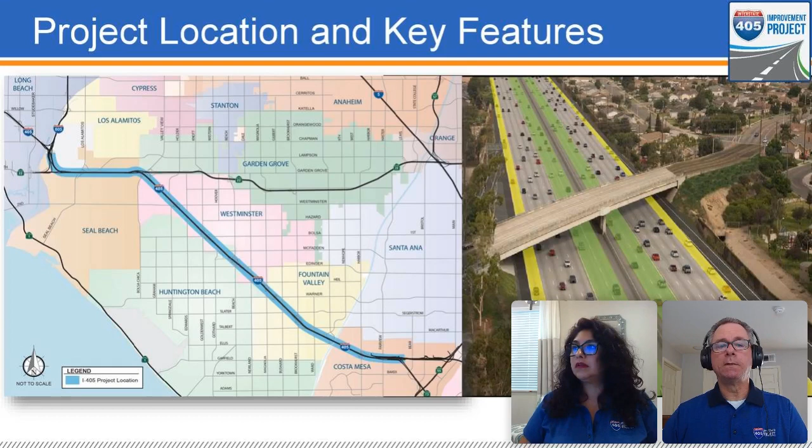Now a little bit about the project benefits. I mentioned the new lanes. We're also replacing 18 bridges. We're adding a new connector from State Route 73 directly to the I-405 express lanes. And we're widening several bridges that go over facilities like Beach Boulevard, Harbor Boulevard. We're widening bridges over the Santa Ana River as well, and a couple where railroads intersect with the freeway. All of the interchanges are being reconfigured in one way or another.

In a lot of cases, for example, say at Brookhurst or Beach Boulevard, you'll notice when you get off coming northbound, you're forced to sort of merge into those northbound lanes on Beach Boulevard, and you've got to try to move over really quick to get a left turn on McFadden, for example. Well, in the case of the new configuration, the northbound off-ramp will come to a T intersection with Beach Boulevard.

We will be eliminating the northbound loop off-ramp. So in other words, the northbound 405 loop off-ramp to southbound Beach Boulevard, that gets eliminated. And you'll be able to make a turn left or right from the straight northbound off-ramp. We're doing that in a lot of places. It's safer for motorists. It makes it easier to get over those several lanes to make the left to those arterials that are really close to the freeway. The other thing it does, of course, is make it safer for pedestrians and bicyclists.

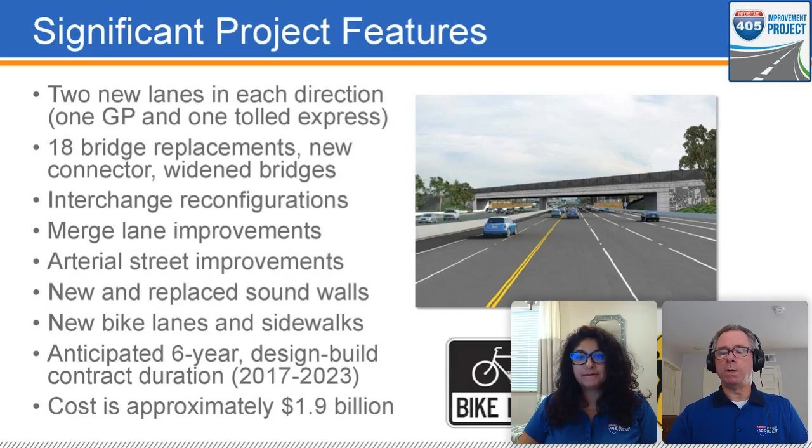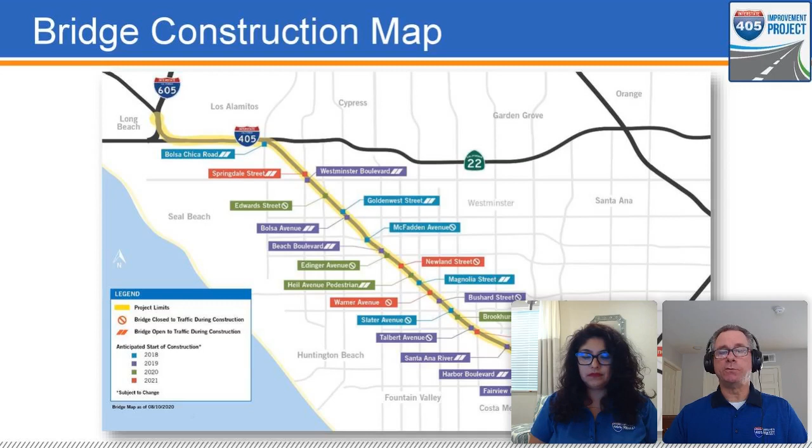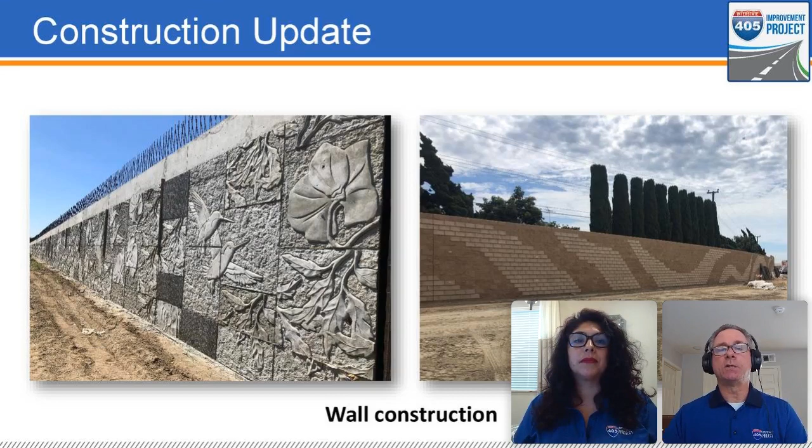So next, I'd like to talk a little bit more about construction, give you a little bit of a construction update. Maybe we can make ourselves a little smaller on the screen there so we can see these photos. So as I mentioned, a lot of walls on the project. More than 70 walls are currently under construction or completed. These 2 photos reflect some of the aesthetic patterns that are being placed on retaining walls and sound walls.

This slide shows the Santa Ana River Bridge, which spans both the river and Euclid Street in Fountain Valley. Now, this bridge is being widened using precast concrete girders. You can see those girders being placed there.

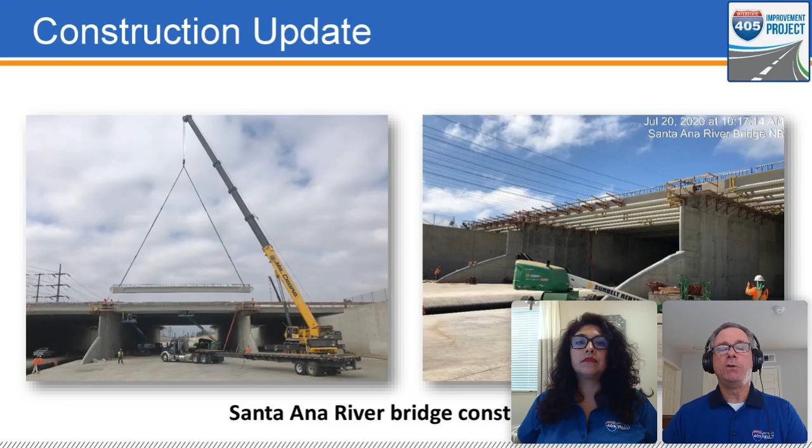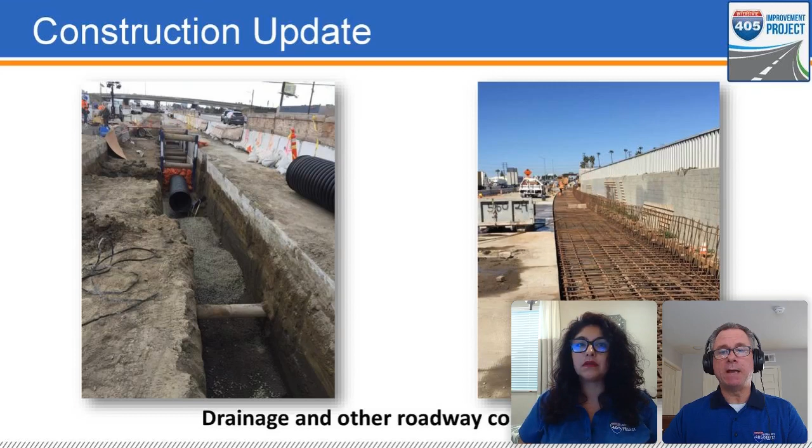This next slide shows the drainage being installed along the side of the freeway in the photo on the left, and the reinforcing steel for a concrete barrier and the concrete pavement in the photo on the right. So you'll see that throughout the project, where, for example, all the ramps are being converted to concrete. It's a little more expensive, but it lasts longer. All of the new lane additions where we're actually running traffic over new lanes, all of that's being implemented as concrete, reinforced steel concrete, just to make it last as long as it can.

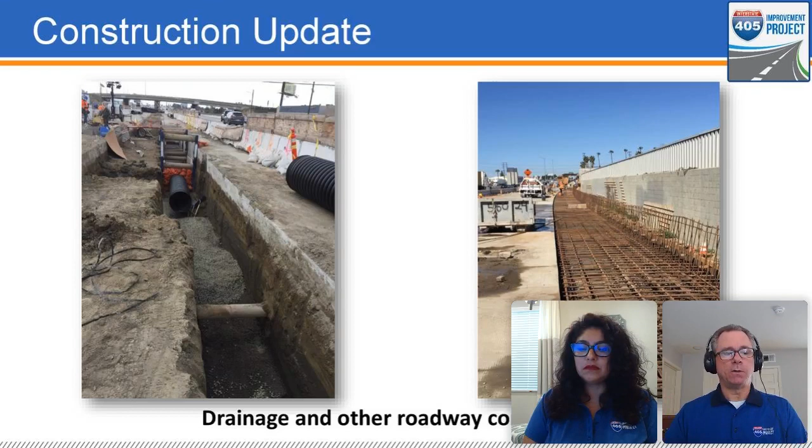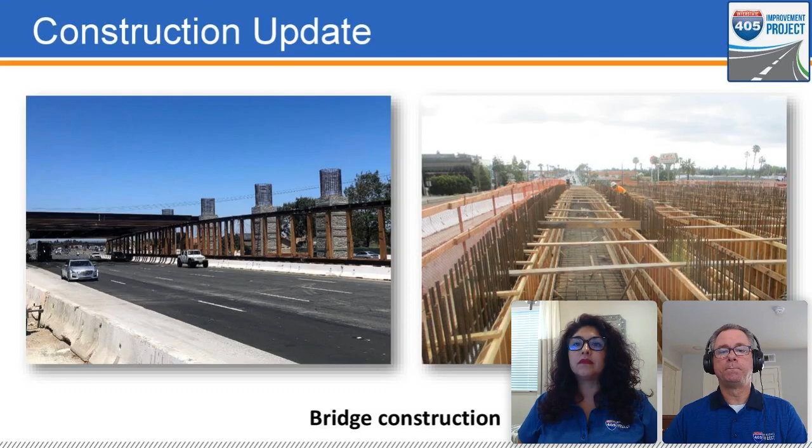The photos on this slide represent additional construction work going on at McFadden and at Westminster. The photo on the left shows the wooden formwork, and those are the forms that are in the bottom of the new concrete bridge. So they really are part of it; they stay there. They're ultimately what's called lost deck. And I'll talk a little bit more about that in a second. And the photo on the right shows the deck being poured for the Westminster Bridge.

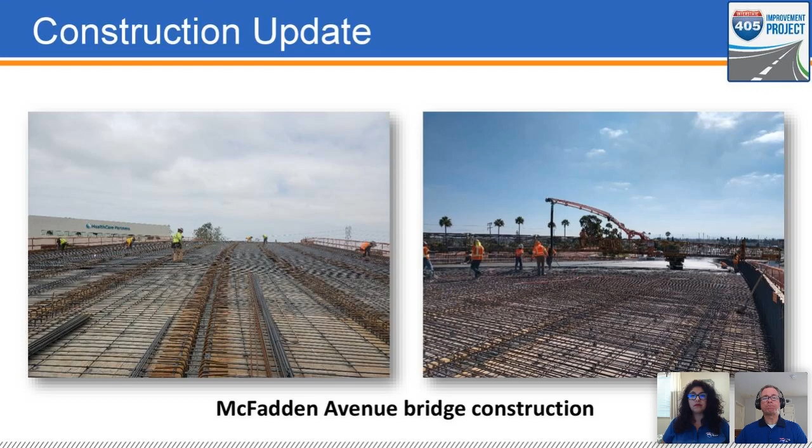Excellent. So now I want to talk a little bit more about what's coming up. Construction of the project, as I mentioned before, is more than 40% complete. And the design builder, that's the contractor, they have about 700 workers actively involved in the project. We've opened the first halves of the Magnolia Street, the Bolsa Chica Road, and the Golden West Street bridges. And work on the second halves of those bridges is well underway.

Work also has begun to reconstruct the Heil Avenue pedestrian bridge. And in the coming weeks, the McFadden Avenue and Bushard Street bridges are expected to fully open to traffic. And after that, work is set to begin on the Edinger Avenue Bridge. We'll talk more about that shortly. And also, we'll be starting work on the first phase of the Brookhurst Street Bridge.

If any of you have driven that in the last few days, you may have noticed that some restriping work has gone on there. We're making room to demolish the median and do some advanced prep work prior to shifting traffic on that bridge and starting the first half of that one. But again, that's in the coming weeks here. And toward the end of the year, we expect the first phase of the Westminster Boulevard Bridge to open and the second phase to begin.

So looking to next year, Talbert Avenue Bridge is expected to fully open to traffic in spring, and that will be followed by the demolition and reconstruction of the Ward Street Bridge. In addition, we anticipate the first phases of the Fairview Road and Bolsa Avenue bridges to open and work to begin on the second phases of those bridges.

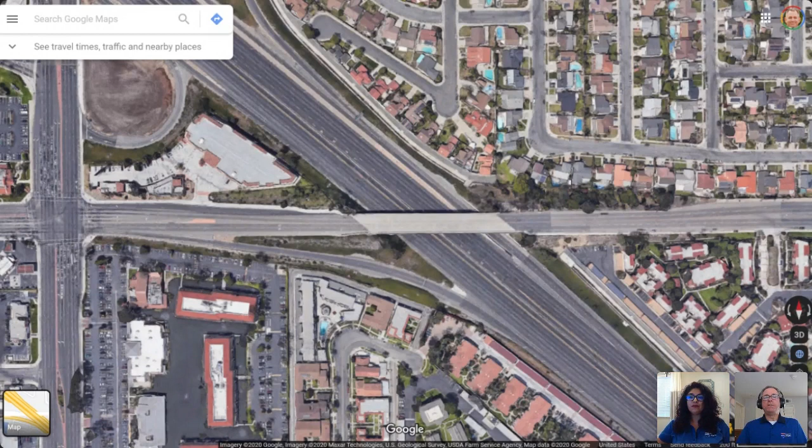The main spans over the bridge are what are demolished over those weekend nights, and then throughout the week and for a couple of weeks afterward, the contractor is removing the sides of the bridge known as the abutments, and also removing the center columns. So there's still demolition work to do after those 2 major nights of work and in between as well.

After demolition, the general process is you build the new bridge abutments, and those are those concrete structures supporting each side of the bridge. And I'm going to try to zoom in a little bit on here and show you those, but many of you have probably seen them.

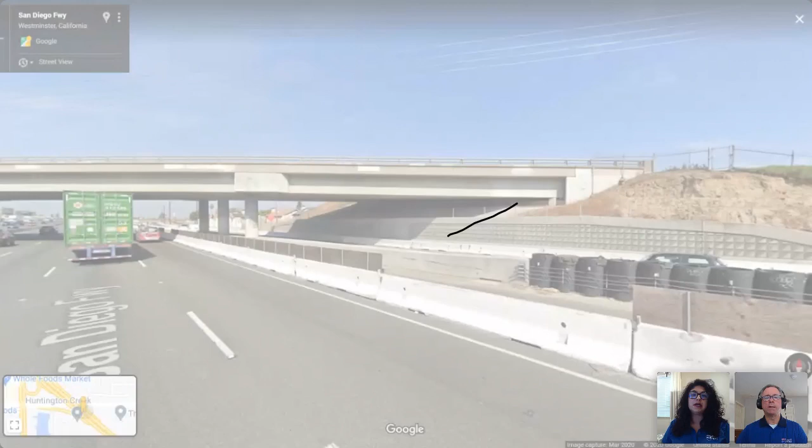And you can actually see here, we're already doing some work, but I'll zoom in a little bit here. And hopefully you can see that. It shows up through there. And as you can see on the side here, these concrete abutments are what are going to end up disappearing, right? And they're going to replace those. That's their first step, is to replace those.

After that, they'll turn to, sorry, let me change that. Undo that. Turn the whiteboard off. I'm going to scroll to the other side here.

So once they finish both new abutments, they'll start to work on these center columns here, the center columns that you see in the middle of the freeway. That'll be their next big step. And then when they're done with the sides of the bridge and the center columns, they'll construct what is known as the bridge superstructure and deck. That is the horizontal structure you see here, the formal bridge itself, and then on top of it, the top of the bridge, which is known as the bridge deck.

And after that, they construct the barriers. That's what you see here at the top with the railing on the bridge. And they construct the concrete approaches to the bridge. They pour the sidewalks, the curbs, the gutters. They pave the roadway leading up to the bridge approaches. They perform any electrical work that's needed. They install the chain link fence, the railing that's going to go across. And we can share some photos of some of that as well. And in general, they finish all of those minor activities, and then they open up the bridge. So all of that at this time is anticipated to take about 18 months.

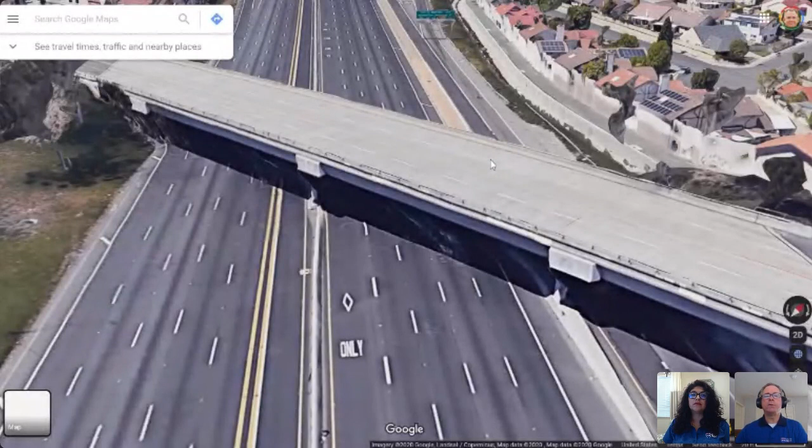As you can see from this bridge, and I'm going to back out just a little bit, this is a pretty good angle to show you what you have here. This is a 4-span bridge, right? Here's the first span right here, because you've got columns going underneath near this northbound, what's known as a collector distributor road. So you have columns underneath here. You have columns in the center. Let me come back to the broadcast and turn my whiteboard on. So you have the first span here, the second span here, the third span, and the fourth span. And you have columns here, and columns here, all the way across.

And the new bridge is only going to be 2 spans. So there aren't going to be any columns here, because the columns right here are going to be replaced with lanes going through there. That's in fact why we have to replace the bridge in the first place. So ultimately, we will be removing those. But in order to get into this center area right here, we need to build the outside sides of the bridge and move traffic. We need to build new lanes right here and over here, and move traffic to those outside lanes so that we can create a work area in the center of the freeway to work on those center columns.

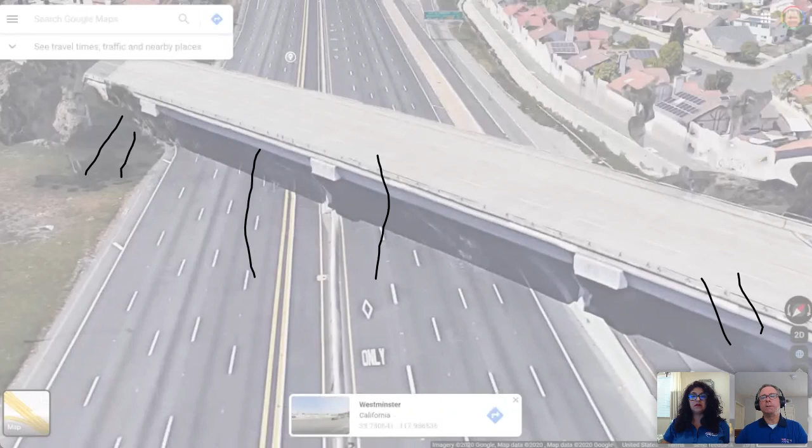However, as you all know if you've traveled this area, this is pretty close. I'll clear my screen here. I appreciate you bearing with me, by the way. This is the on-ramp right here from Beach Boulevard, right? So it's the Beach Boulevard on-ramp to the southbound 405. That ramp has to be in its final alignment for us to build the new lanes that'll go through this location, and move traffic onto them. So any work tied to the center columns of the new Edinger Bridge is actually related to completion of the new on-ramp from Center Avenue.

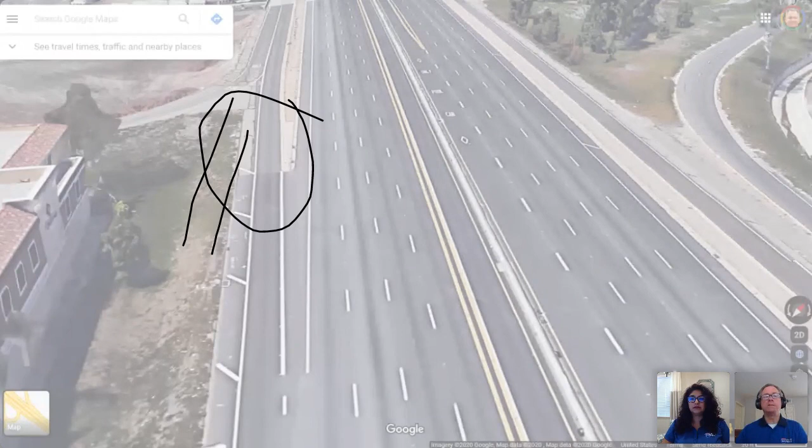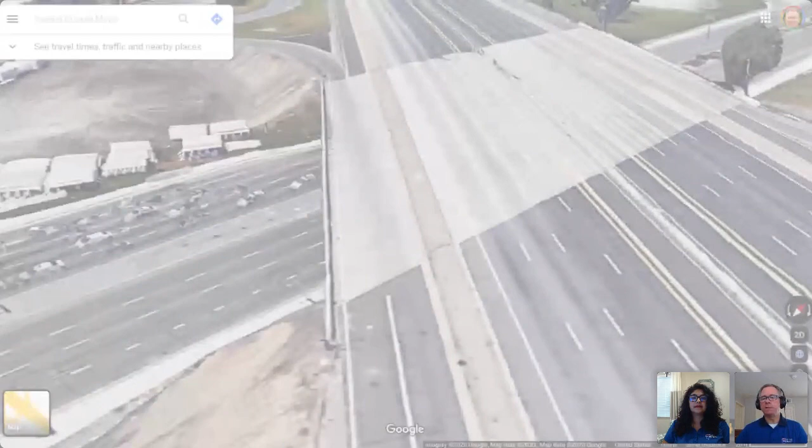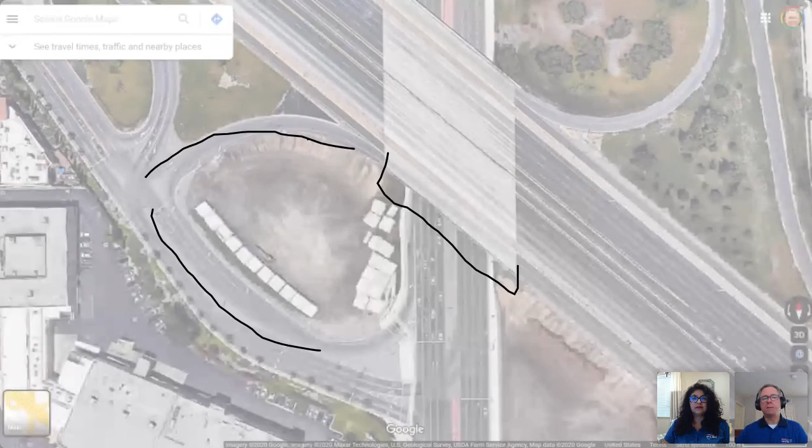And I'll come down here and show you that. Again, getting rid of my drawings here. So this is Center Avenue. And this is that on-ramp, as you can see. And this has to be complete. All of this work along Center Avenue, and this new on-ramp has to be constructed. This bridge is currently being widened, as you probably know. And all of this has to be done prior to us shifting traffic over at Edinger off to the side of the freeway.

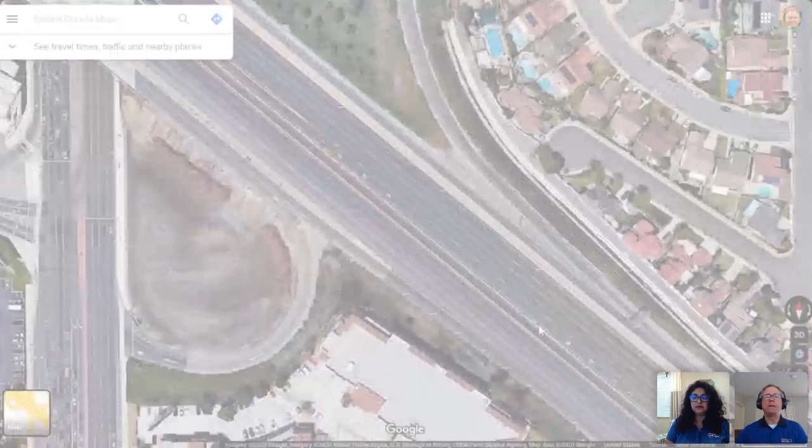So prior to being able to shift this traffic over here, all of the work up at Center Avenue has to be completed. So to be conservative, we're saying 18 months for the completion of the Edinger Bridge, because we just don't know what might happen, what might be an issue that might come up, with Center Avenue. So we're taking a conservative approach. Typically, when we talk about single stage bridges, we talk about 12 months for those things to occur.

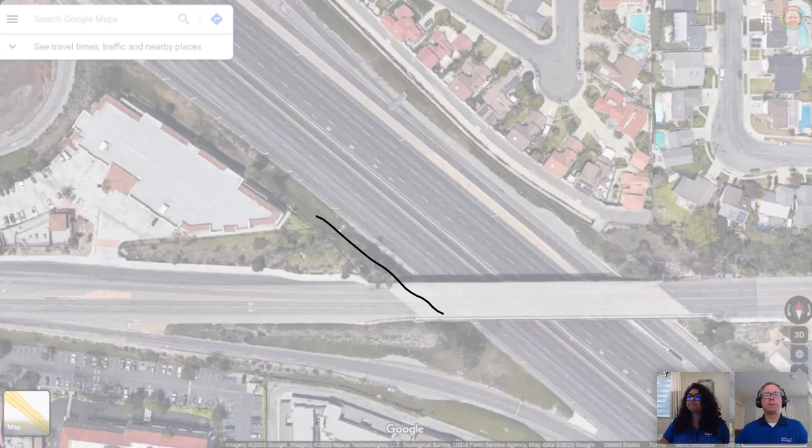All right, I'm going to move out of this, I believe. Make sure I'm completed with my discussion about Edinger. Of course, you'll have the opportunity to ask questions. I'm going to go back and restart our slideshow. Stop sharing that. All right, it's Joey and me. I'm going to come back to the slideshow. I might have to course through it, so bear with me.

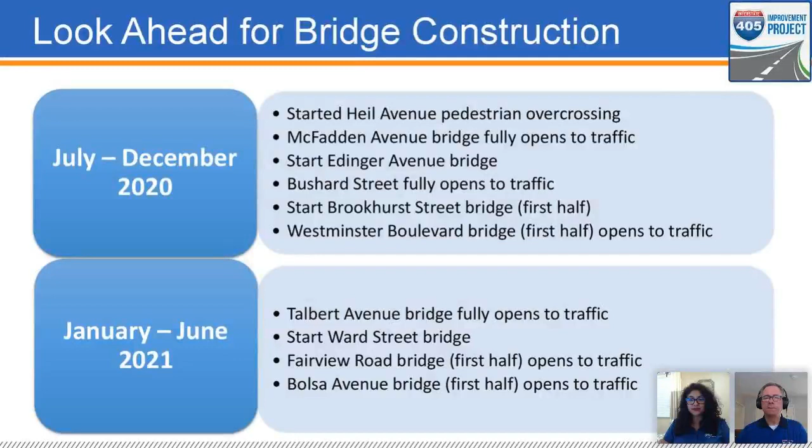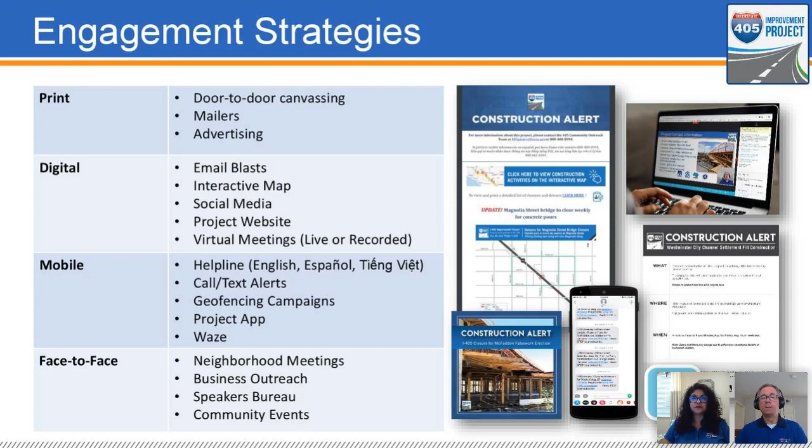And meanwhile, please make use of our interactive map at octa.net/405map and download our mobile app on the App Store or on Google Play. Of course, you can always find us on social media, and if you have a specific question, you can reach us there, or you can call our project helplines or email us at 405project@octa.net. If we don't have an answer for you at that time, we'll work with our colleagues on the technical team and get back to you within about a week or so.

So that pretty much wraps up my presentation. We have another poll that I'd like you to take. This leads me to it, and that is, what is the best way for you to get construction updates? So while you're taking that poll, if you haven't had a chance yet, please jump into the chat window and post your questions. Joey will be sharing those in a moment. Excellent.

Okay, you ready for questions? I am ready for question number one. Please go ahead. I believe you answered this, but I'm going to go ahead and put it up there. Great. Will the McFadden Avenue Bridge be open before Edinger is closed? And the answer to that question is yes, it will be. Okay, moving on to the next.

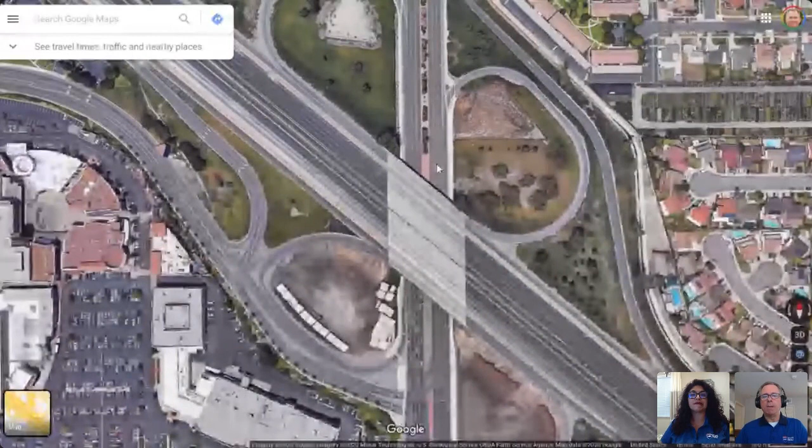All right, so you've got north-south, you have Beach Boulevard, right? And here is McFadden, right? So you'll be able to go south. We don't anticipate ever closing Beach fully, except very intermittently. Once in a while, we might need to do it. We've virtually completed the widening on the south side of the freeway. The north side widening is coming up. You know that we've closed and reconfigured this loop on-ramp.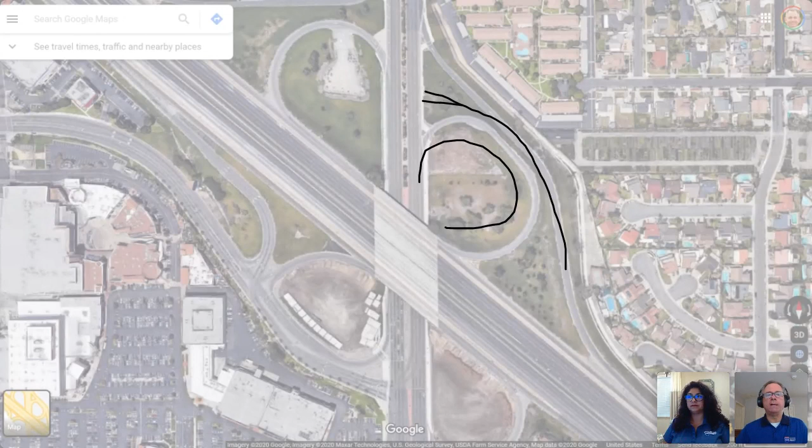Pardon me. I'll bring my whiteboard up again. We've reconfigured this ramp already, right? This ramp has been reconfigured to end here. It still is right turn only here, but ultimately the configuration will be such that this ramp, and I'm going to move my screen down a little bit here to clear this. So this off-ramp will come to a T. It already is almost in that configuration. It's in a temporary configuration right now, in a construction stage configuration.

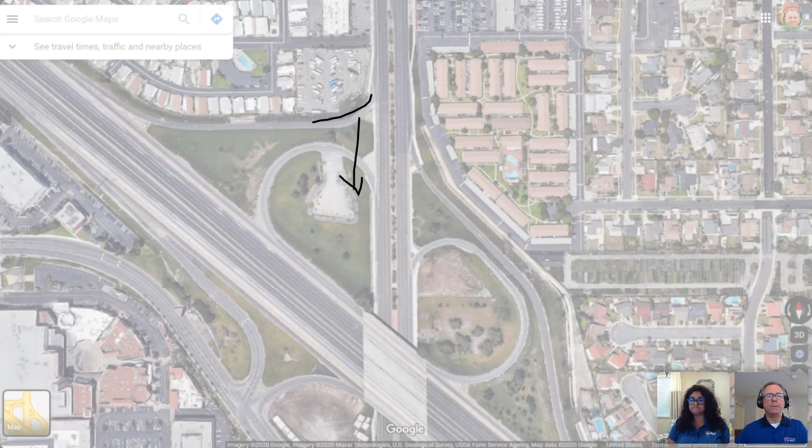And this ramp will disappear. This ramp on the southbound is going to be realigned closer up here. Sorry, I'm going to clear that. And talk about this ramp. It's going to move south. And you'll be coming on at this angle. And I think that actually might already be somewhat in play. And then again, you'll come here and you'll come to a T. And there'll be a signalized intersection and you'll be able to turn right and go north or turn south.

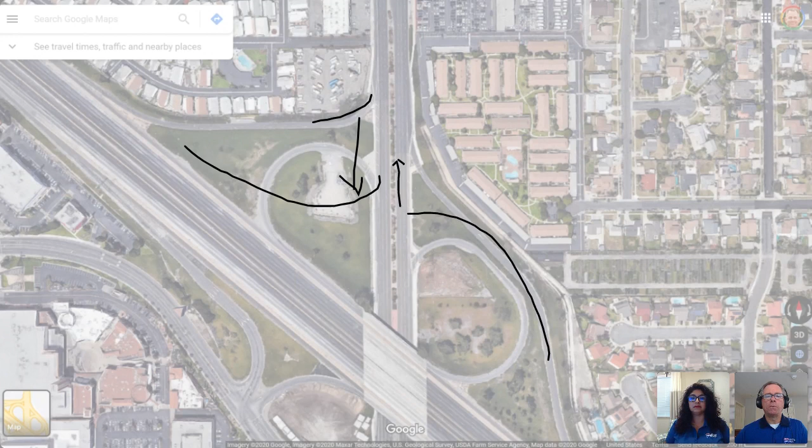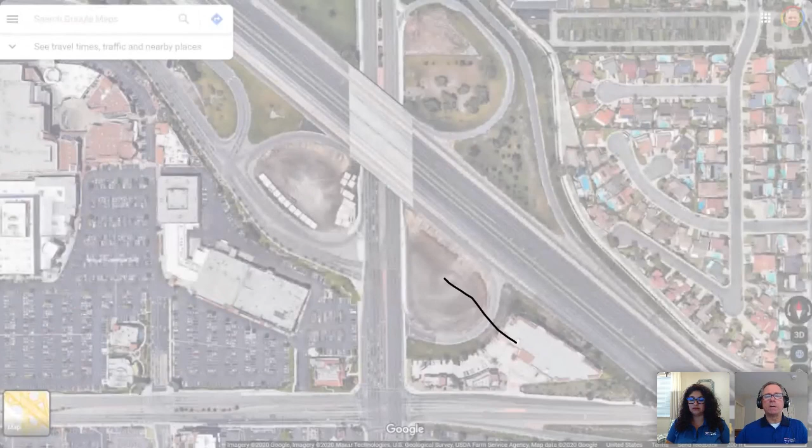The same applies. And I'm going to come here. Again, clear my screen. This ramp, if you haven't seen it, has already been eliminated. This already has a signal at it. Center Drive is being widened, and there will be two left turn and two right turn lanes to go north and two to go south.

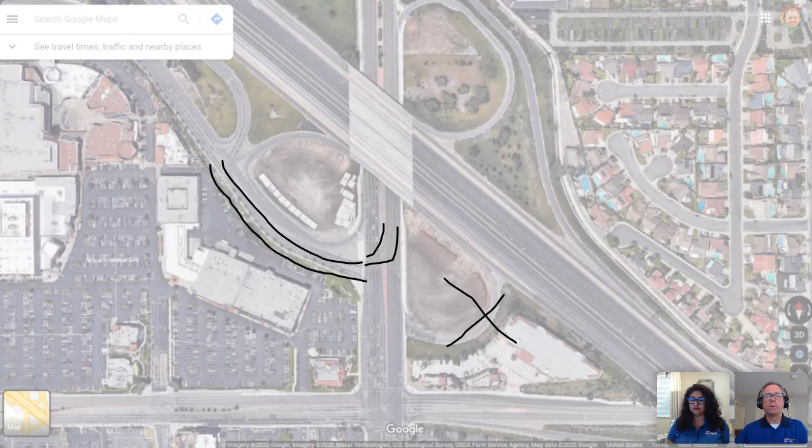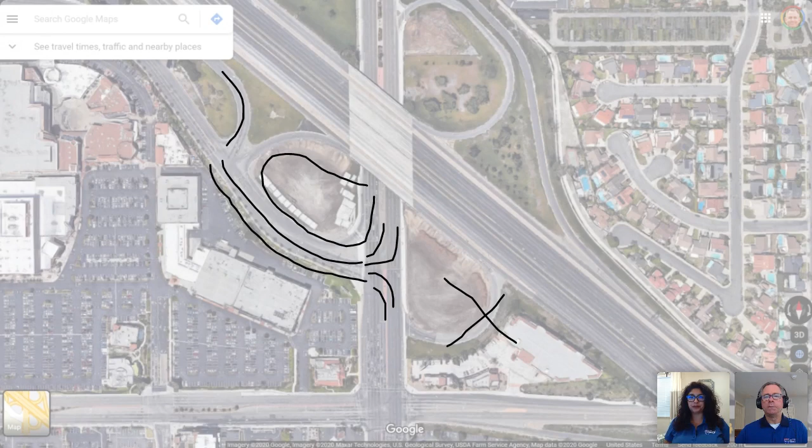And this, of course, is being reconfigured here to loop on. It's a little tighter, and this is being reconfigured to come off here. So those are most of the changes that are happening at Beach Boulevard. And it does give you a sense of that. But yes, during construction, you will still be able to head south on McFadden from Beach Boulevard.

I'm going to stop sharing that screen. Come back to us. Any more questions? Yes, and I don't know that you answered this. You may have already. Yeah, we asked Tim to reach out to us, Joey, with more specifics about his question, and then we'll be able to help him with that. And by the way, any questions that we get during this session that we are unable to answer or need to go to the technical team for, we'll capture that in a Q&A, and we will email everybody who's participated in the meeting, everybody who's signed up for the meeting.

Got it. Okay. This is from Alan. Alan says, Edinger is a very heavily used street. What is being done to minimize the impact on surrounding streets? If you mean during construction of the bridge, which I suspect is what you do mean, again, the maintenance of traffic, the MOT team, comes into play. So at the start of the project, there is an analysis of each of the bridges and what the impact is or is not going to be on a given surrounding set of arterials and intersections based on bringing that bridge out of service and having official detours set up.